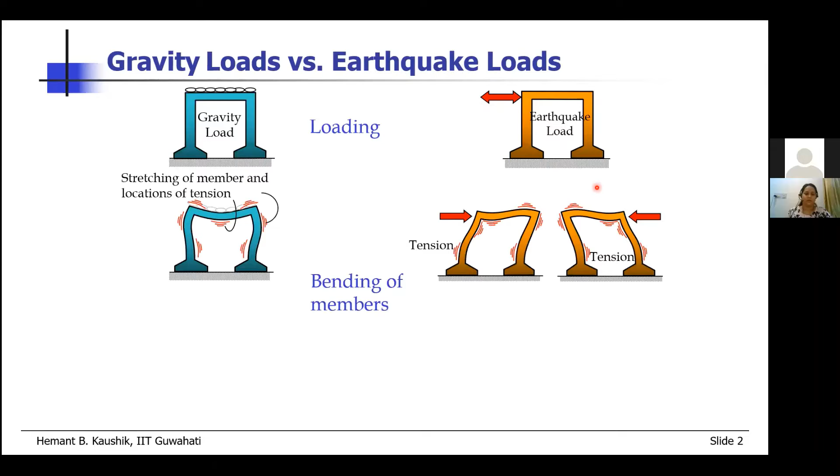In gravity loads, we understand very clearly that if there is a load acting on this beam, it will deform in a certain way, and because of this deformation, there will be corresponding deformation in the columns. We know in a very deterministic sense that there is stretching of members at the bottom of the beam at midspan, and at the top of the beam near the supports. These are the locations where we need reinforcement. Similarly, in columns, we know very well where will be the tension and where we need more steel.

In case of earthquake loading, the earthquake loads reverse—they change direction at every instant of time. So at one instant it acts from left to right for this frame, and at the other instance from right to left. Because of this change in direction, the bending of the members also changes.

So for one particular instance, the face of the member, or the location in the member that is under tension, may not remain under tension at the other instant. Some other locations in the member will undergo tension instead. That means we need to be careful about designing these members as far as the earthquake loads are concerned.

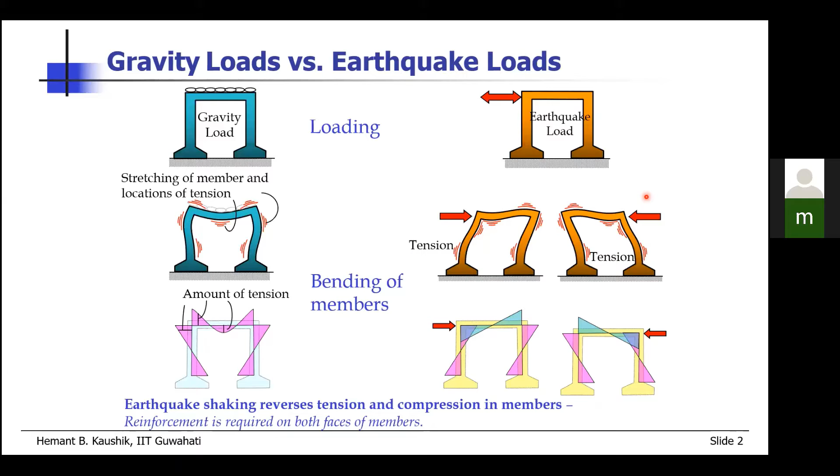There are many other uncertainties related to this type of loading. We will discuss all those uncertainties, and how to handle and take care of them in our analysis and design. And finally, how to estimate the vulnerability or the risk.

This vulnerability assessment cannot be done using hand calculations. You need to have some computer programs, some analysis tools. So what do we expect from a computer?

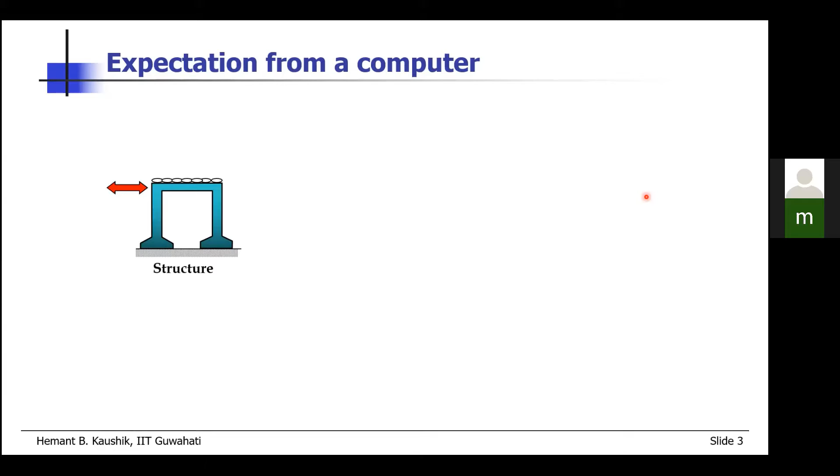So we have a structure and we have a computer. What we want is somehow to feed the structure into the computer, and then we expect the computer to do this analysis and give us the deflected shapes or the mode shapes, which we have just seen. Depending on that, it will tell us the force resultants, which we use along with the deflected shapes and mode shapes to design the structure.

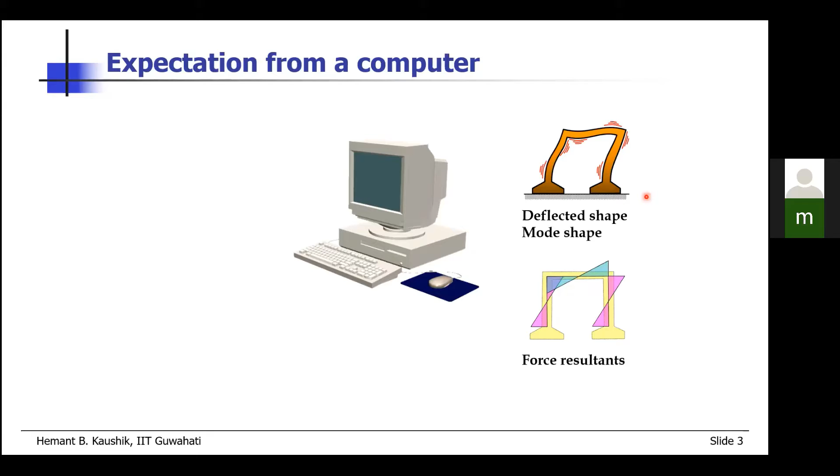Now this is very simple when I say it, but you also understand that the quality of these deflected shapes, mode shapes, and force resultants depends on the quality of the input. If you feed junk into the computer, you will of course get junk out. So the input parameters we give to the computer program are really important—most important—to provide realistic input and model the structure properly so that we get meaningful response quantities.

The question remains: how do we analyze? Historically, we have several methods of structural analysis, starting with the linear static analysis, which is the simplest method. One of the linear static analysis methods is the equivalent static analysis, which is also given in our Indian standards.

The next type of analysis, which is slightly more complicated and requires more input parameters, is the linear dynamic analysis. As the name suggests, this method includes time variation—it is a dynamic analysis. So loads here change with respect to time, but the previous one was the static analysis.

In case of linear dynamic analysis, we have quite a few methods. I'm just showing you two here: response spectrum analysis and time history analysis, where we apply real ground motions to the structure, but assume the structure behaves linearly—there is no non-linearity modeled here. So here the structure was linear and the loads were static and constant; now the structure remains linear, but we have changed the loads to dynamic.

The third type of analysis is where we consider the non-linearity in the structure—it may be material non-linearity or geometric non-linearity. Again, we do not consider the variation in loads with respect to time, so it becomes non-linear static analysis.

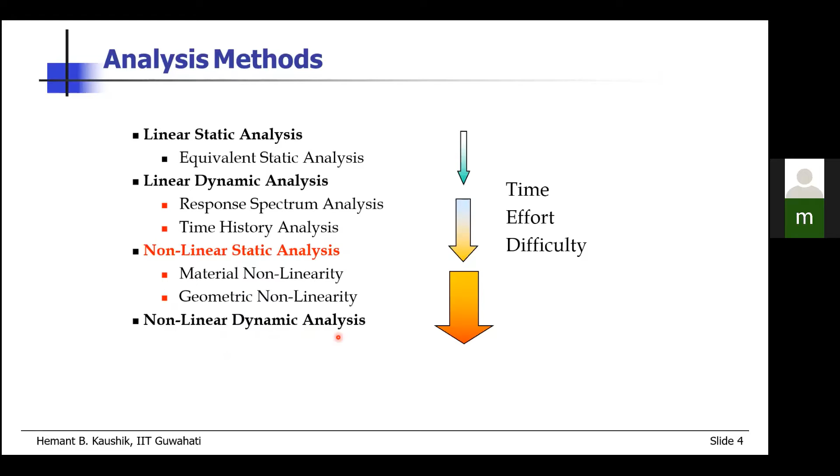Mode shapes of buildings are one of the important properties of the structure that depend on all these parameters. Whenever we carry out any dynamic analysis, we always first look at the mode shapes. That tells us if there is any problem with the model, how our structure behaves, what kind of natural frequency it has, and what kind of different mode shapes it has. So mode shapes are a really important property of the structure, and they depend on all the input parameters we just spoke about.

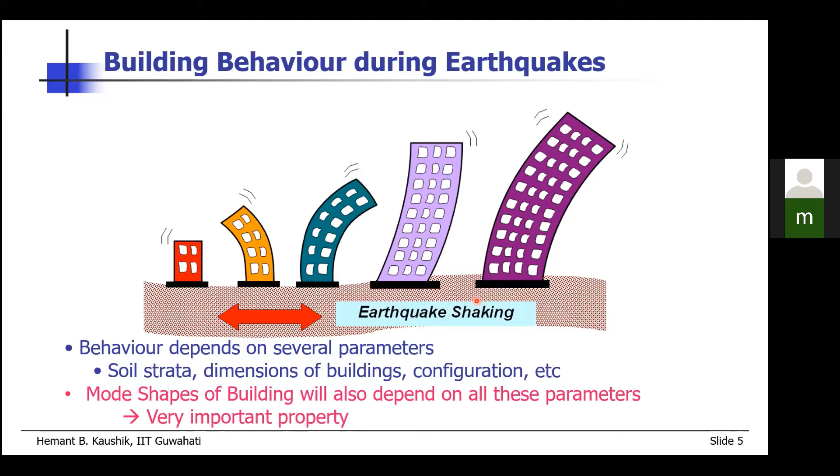Considering all these issues, when we want to estimate the risk, we need to know the hazard at a given site. What is hazard? We'll discuss in detail what hazard is and how we estimate it. We need to know the vulnerability of the construction - that is what today's lecture is all about. Why do we need seismic vulnerability? Because it is one of the input parameters required to estimate the seismic risk. That's the simple reason. Risk is also a function of the exposure of the elements.

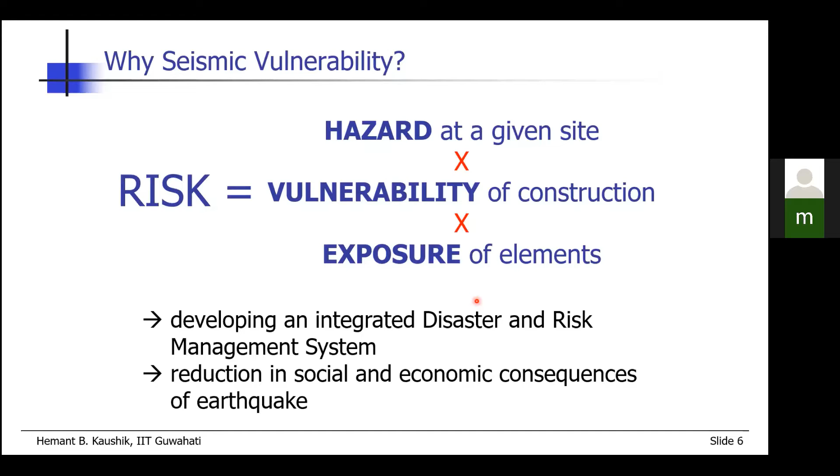These three quantities, which are themselves quite complex in nature, combine together to give the estimation of risk. Why do we need the risk? In order to develop an integrated disaster and risk management system for any city or town, we have to understand how much risk there is to different properties and things, in order to reduce the social and economic consequences of any hazard. Earthquake is just one hazard - if you live in a flood-prone area, you need to estimate flood risk; if you live in an area with cyclones, you have to estimate that risk. So risk is always a function of these three parameters: hazard changes from region to region, the vulnerability of construction changes, and the exposure of elements also changes. This is why we need the assessment of seismic vulnerability, primarily to estimate the risk involved.

Now, if I want to define the vulnerability properly, let's concentrate on how many things are required to define or estimate the vulnerability. The degree of loss or the probability of loss to a given element at risk resulting from a given hazard in a specified time - this is a proper definition of vulnerability.

So what we are talking about is the amount of loss, or the degree of loss, or the probability of loss to a given element at risk. That means maybe we are talking about some elements of a building, or the building itself, or a group of buildings, or a town itself. This is the degree of loss to the given element at risk resulting from a given hazard.

So maybe we are talking about earthquake hazard, or cyclone hazard, flood hazard, or any other hazard in a specified time. We have to define the time during which we are actually determining or estimating the seismic vulnerability. So we have to determine or estimate all these parameters in order to find the vulnerability.

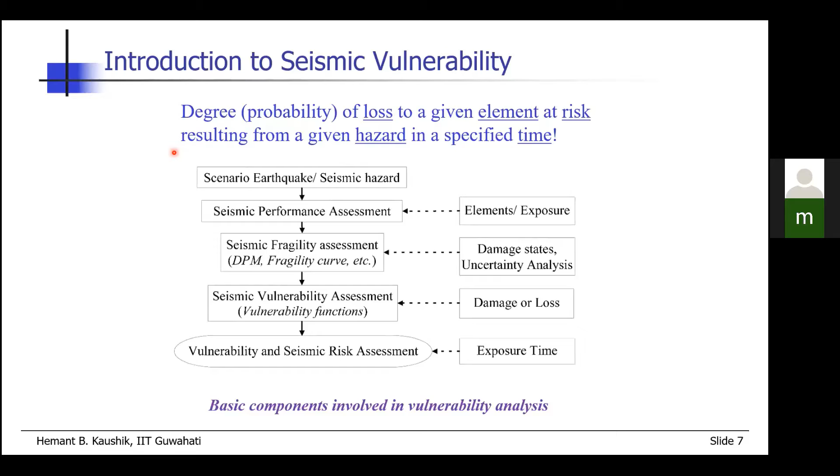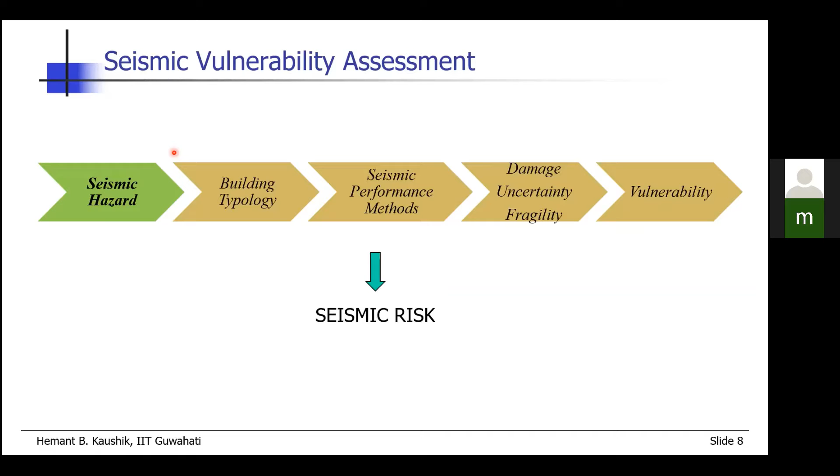So let us consider each of these, let us discuss each of these steps in more detail. These five steps will provide all the necessary tools to estimate the seismic vulnerability. I'll devote some time to each of these steps, which is finally required to find out the seismic risk. First is seismic hazard - so let us discuss how do we estimate seismic hazard and what is actually the seismic hazard.

If you want to define it, seismic hazard is any physical phenomena, maybe ground shaking or ground failure, associated with an earthquake that may adversely affect human activities. This was a definition provided by Shah in 1984. In simpler terms, any physical phenomenon associated with an earthquake that can damage structures or affect human lives—that is the seismic hazard, because it is related to earthquakes.

But remember, it may not be directly because of the earthquake shaking, but it may be the effects of that earthquake shaking, like ground failure or landslides.

There are two methods to estimate the seismic hazard: deterministic method or probabilistic method. Choice of method depends on the scope of work, the purpose of the work, and most importantly the availability of data. Any probabilistic method requires a huge amount of data, and even deterministic analysis improves with more data.

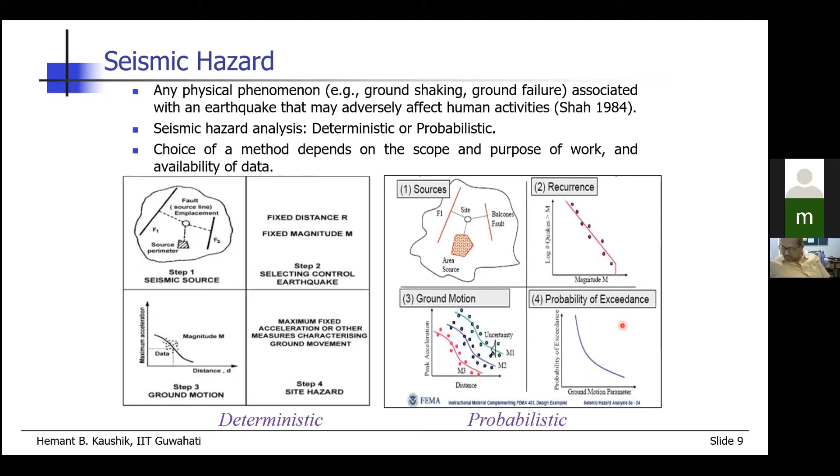This is basically the probabilistic hazard. For example, there's a 50% chance of exceedance of a magnitude 6 earthquake, or a 25% chance of exceedance of 0.3 g PGA. This is how we define the seismic hazard.

What is the output of this seismic hazard analysis? It is shown here. Before discussing this, let me first discuss this figure. This is the design response spectrum given in our IS code. Using this design response spectrum, we design our structures. So the deterministic response spectra is shown here.

So what it gives you is the period of the structure. Let us say it is 1 second. And for that structure, what will be the spectral acceleration, how much will be the design acceleration, considering 3 different types of soil? If the structure is located on rocky soil, it will be designed for lesser acceleration. If it is on soft soil, the same structure will be designed for higher acceleration.

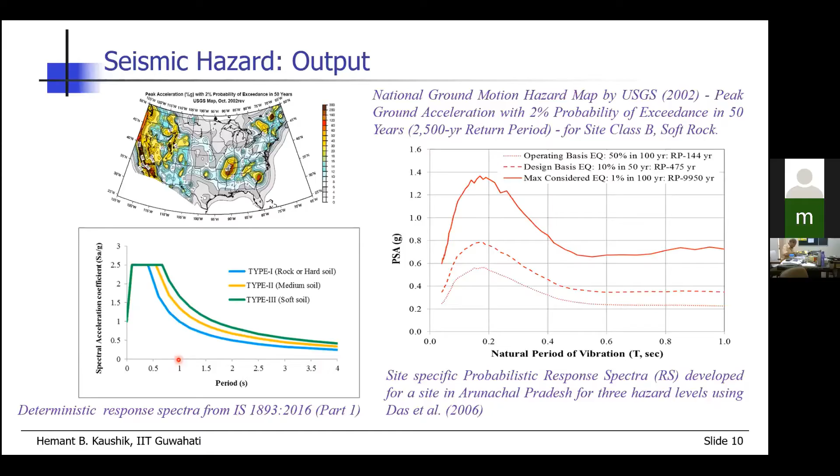Seismic hazard output is being prepared for India, and I think within a few months or a year we will also get such kind of maps in our IS 1893.

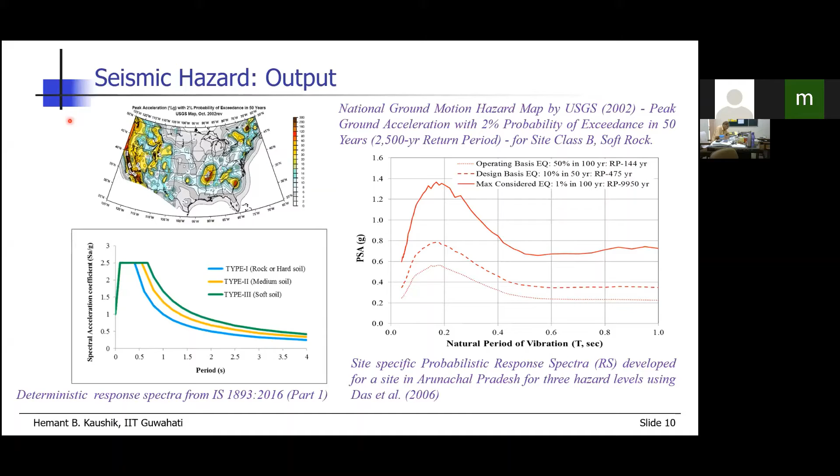Okay, so once we determine the seismic hazard, the next step is building typology, determining or identifying the building typology. But before I go to that slide...

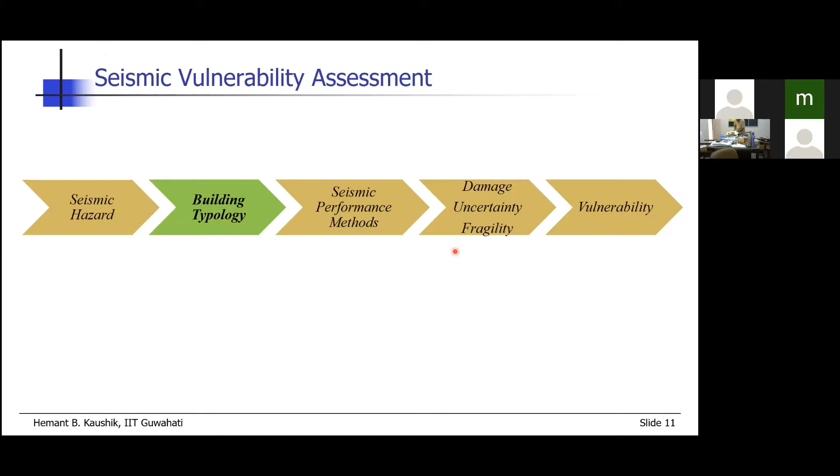This is a very important step because particularly in Indian conditions, you will appreciate that there are a large number of building typologies available. So unless we know what type of buildings are there, we will not be able to determine their performance or how they will damage under different seismic hazard conditions. So then it's impossible to assess the seismic vulnerability. Let us see how we identify these building typologies.

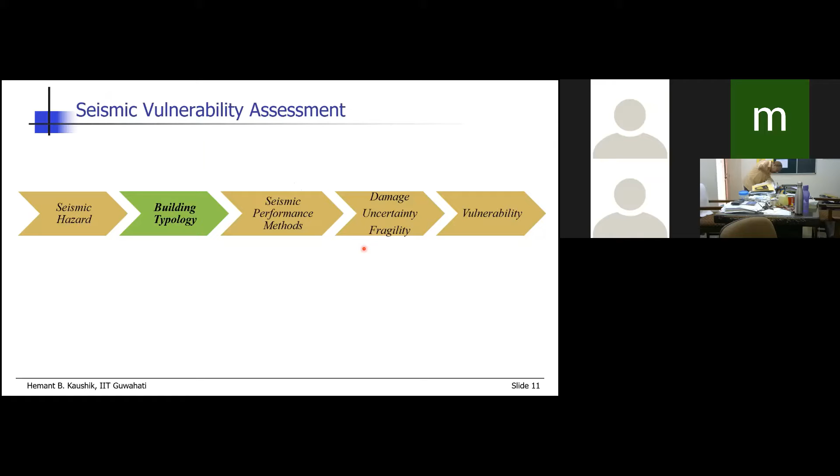Now the simple step here is identifying the building inventory - first to know what are the sample of buildings. We cannot visit every building in a city to do this, but we have to select samples which represent the prevalent building stock in an area.

Now there are a large number of parameters considered in classifying buildings. Some of these parameters are the structural material - reinforced concrete, steel, masonry, aluminium, whatever. Structural system and configuration - is it a frame system or simply an unreinforced masonry building? The configuration means whether it is an open ground story building, a braced building, a very tall building, or a short building. So that comes under configuration.

The number of stories or height - low rise, medium rise, high rise. The age of the building, how is the maintenance - because buildings maintained poorly will of course perform poorly during earthquakes.

And this is not an easy task to find out. What type of soil is there? What type of foundation is provided? Is there structural continuity or are there structural gaps between different modules of the structure? What type of design and detailing is there? What is the construction quality?

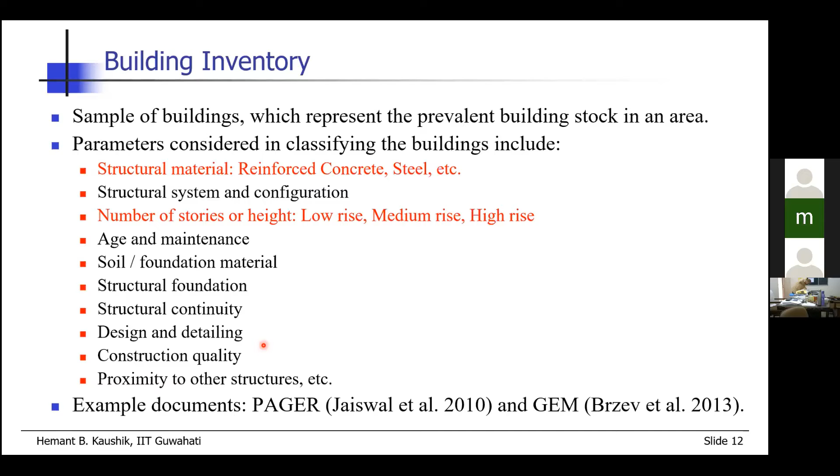So there are many documents available, actually a large number of documents. There are two very widely used documents. The first is PAGER, Prompt Assessment of Global Earthquake Response. And second is GEM, Global Earthquake Model. So these are widely used models to define the building inventory.

You may not appreciate now why we need to be so worried about this building inventory, but in 2-3 slides you will start appreciating it. Now there are many models available in the literature which define these building inventories. For example, Medvedev and Sponheuer define the MSK classification.

So they're more worried about the construction material. They don't bother about the building height or the load resisting system—only based on construction material, they define the building inventory. But then there are many others. For example, ATC 13 defines everything. It classifies the building based on load resisting system, building height, material, construction quality, soil foundation, age, and proximity. So it's a very detailed document. Similarly, there are many others.

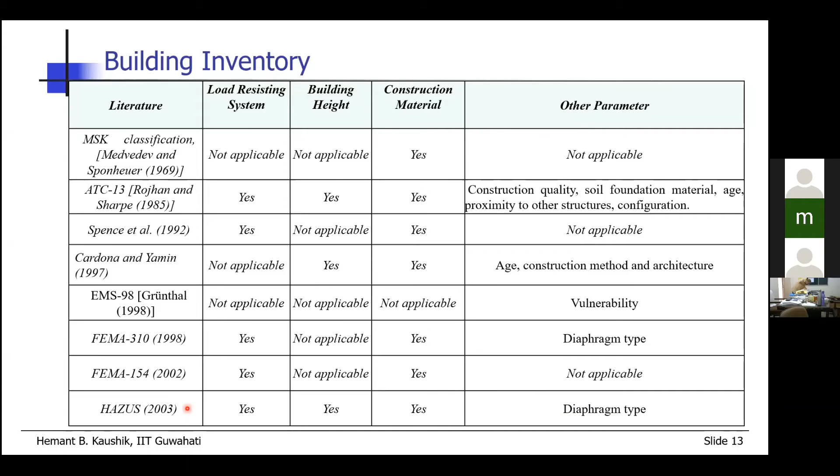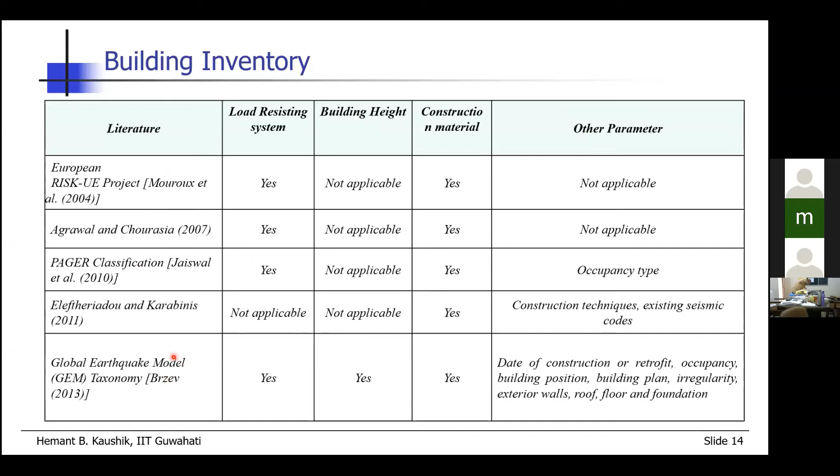And this MSK, you must be knowing, is an intensity scale. Another is EMS, that is also used. FEMA documents are there. Recently, this HAZUS—or people also call it HESUS—is one of the most recent and most detailed building inventory documents. You will find a large number of buildings in the whole world here. Then many others, like the European project, Mouroux classification comes here. This is the Global Earthquake Model, GEM taxonomy. It is also very detailed.

Once we understand what type of building typology is there, the next step is to determine its seismic performance—to model this building and find out how it will behave or perform during earthquakes of different intensities. Now, if we don't know the type of building, the material used, the framing system, the proper dimensions, or the lateral load resisting elements in the building, if we don't know these parameters, it is impossible to find out the seismic performance.

We cannot plot the bending moment diagrams. We cannot model the nonlinearity in the building. So that is why it is very important.

I was involved in one of these studies where we find out how many building typologies exist in the northeastern part of India, in all the states here. So we visited many places and found that in a single Arunachal Pradesh state, there are more than 500 building typologies. If you go to different villages, there are many building typologies which are not there in any other village. Similarly, if you cover the entire country, you will have thousands and thousands of building typologies.

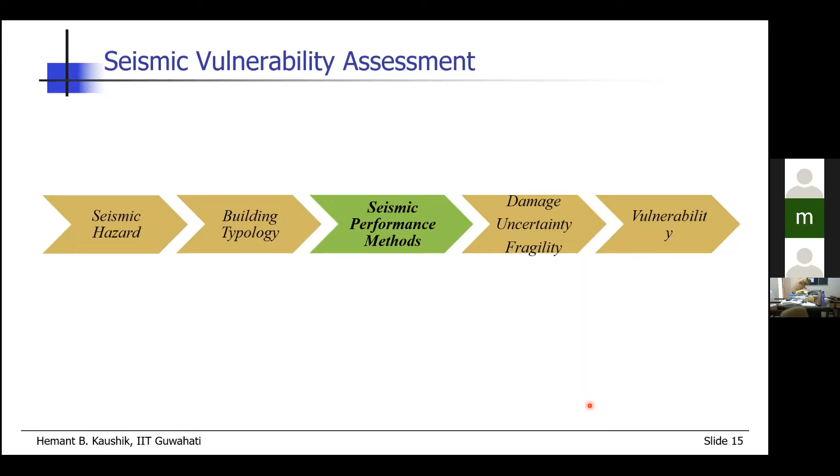So next is the seismic performance assessment methods. Once we define the hazard and the building typology, clubbing these, we have to find out how this building will behave during earthquake. Now, there are primarily two methods that people generally use in seismic performance assessment: the nonlinear static method and the nonlinear dynamic method. Both are good, both have their advantages, both have their disadvantages. So depending on the availability of data and the requirement, we use both of them.

Nonlinear static and nonlinear dynamic, as the name suggests, both cover the nonlinearity in the material or the nonlinearity related to the geometry. But in the first case, the loads are static in nature, so we don't use ground motions here. In the second case, the loads are dynamic in nature, so we use real ground motions for structural analysis.

And that is the whole reason nonlinear static analysis methods are computationally less expensive—they require less computational time and effort. But nonlinear dynamic methods, because they need real ground motions, require comparatively higher computational time and effort. We cannot include the higher mode effects or the dynamic and inertial effects here in static methods—we include them, but only within approximation. The real inertial effects cannot be included like we do in the dynamic method.

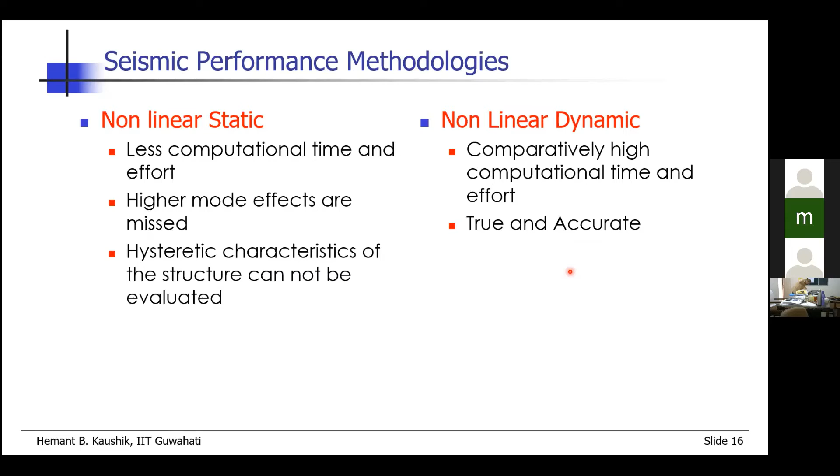The hysteretic characteristics—basically the cyclic nature of loading with high frequency—are not determined in case of nonlinear static analysis. But in nonlinear dynamic, we can capture all these things, though we require a lot more input data. So we will first start with a very simple method, which is the capacity spectrum method of analysis.

So what we do here—first, why do we need this capacity spectrum method?

This is to basically determine what will be the performance of the structure because of a particular earthquake. So there are two different modules here. First is the construction of demand spectrum—how much is the demand on the structure? And the second is construction of the capacity spectrum—how much is the capacity of the structure? So we need to combine these two.

We need to superimpose the demand and the capacity of the structure to get how much will be the requirement from the structure from that particular hazard. So how do we calculate the demand? We have already covered the seismic hazard assessment. We consider the earthquake, and from that earthquake record, we develop the demand spectrum, the spectral acceleration versus the spectral displacement—this is the ADRS spectrum.

And we convert this elastic design spectrum, elastic demand spectrum, to the reduced demand spectrum, considering the various uncertainties and a variety of parameters. We'll discuss this later.

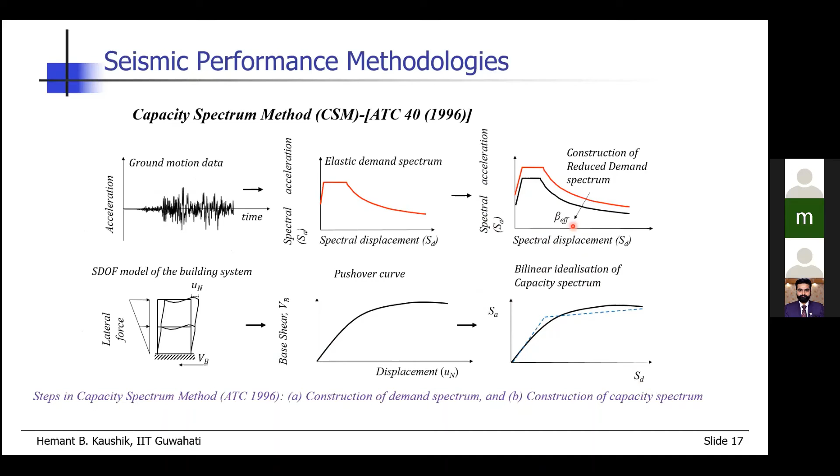Another method is the displacement coefficient method. Here we don't require the conversion of the capacity curve into a capacity spectrum. If you remember, we converted this capacity curve into the capacity spectrum, which is the SA versus SD curve, similar to the demand spectrum. Only then can you superimpose these two. So that takes time to do.

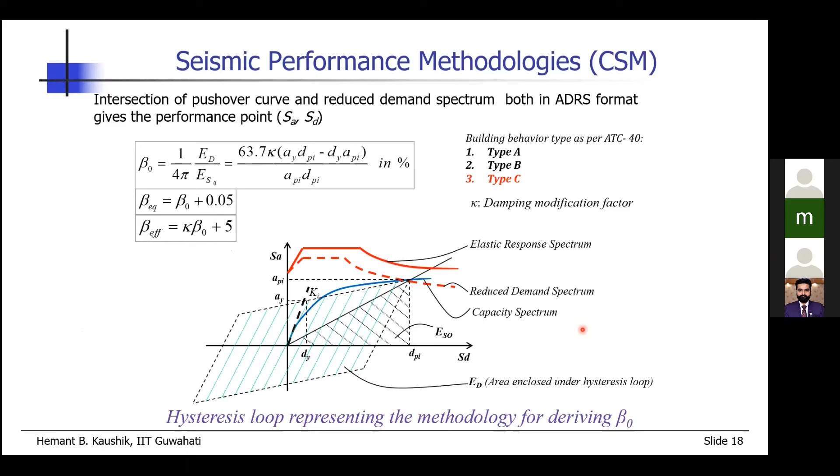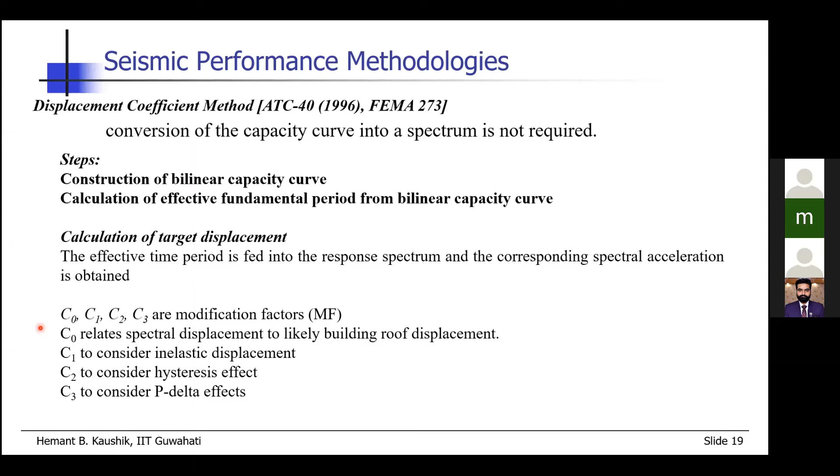Therefore, the capacity spectrum method shown here was modified, and people have proposed another method, the displacement coefficient method. The steps are similar. We first construct the bilinear capacity curve, and we calculate the effective fundamental period from it. Then we calculate the target displacement—there is a detailed methodology given where, without converting the capacity curve into a capacity spectrum, we can determine the target displacement using this method. So what we need is the target displacement so that we can move to the next step.

Then there are other methods also available. For example, the N2 method is there for seismic performance assessment. It is based on the ductility dependent inelastic response spectrum. If you remember, previously we used the elastic response spectrum or equivalent nonlinear response spectra. So here is the inelastic response spectrum.

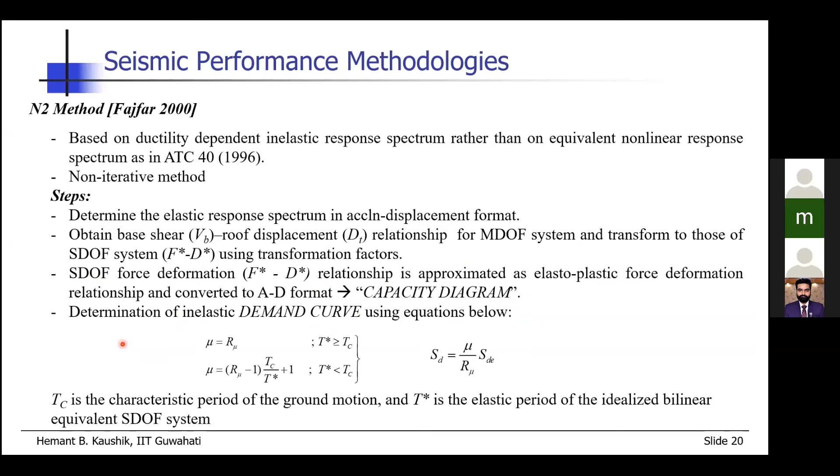Now determination of this inelastic demand curve, basically the response spectrum, is done using these methods, which are standard methods available in any book. So once you do this, we are ready to determine this. It gives us directly, without iteration, the target output. So this is as far as the nonlinear static analysis methods were concerned.

Now there are nonlinear time history analysis. So these are the dynamic analysis where we consider the nonlinearity of the structure, as well as we consider the real ground motions, which are random in nature, so the loading here is a function of time. So what we do here is we apply the acceleration record data to the structure and we obtain step-by-step response of the structure. So you will realize that here the output that we get is very large. Huge amount of output is generated here.

So let us say you have an earthquake which is of 30 seconds duration. Now you have to define these earthquakes using a large number of points and you give it to the software. So for each of these points, for each of these accelerations in the ground motion record, the structure will respond. And for every instant, you get a response of the structure as an output. So overall the size of the output is tremendous here. So you have to read it. It's very complex, and how to interpret the output.

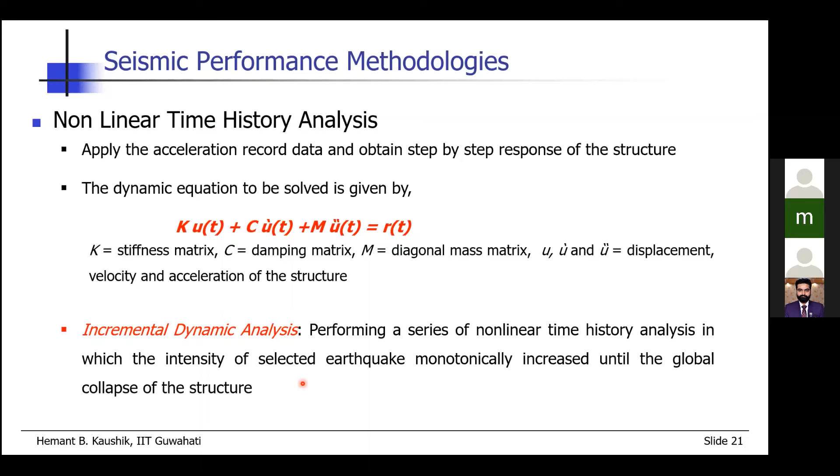Now, again, it is not easy to find out when the structure is collapsing, because it is not something which is similar to the nonlinear pushover analysis. Here you have to actually plot the IDA curve, and depending on the slope of that IDA curve, IDA means incremental dynamic analysis, you have to judge, like, this is where the structure has yielded, this is where the structure has collapsed. But it gives you a lot of additional data.

Fine, so once we know somehow how is the seismic performance of the structure, the next step is integrating the damage, integrating the uncertainty, and integrating the fragility to these seismic performances.

The first step is the damage states. We have to define these damage states for a particular structure. These damage states are a function of building typology, so they will be different for different types of buildings. For reinforced concrete buildings, the damage states will be different. For unreinforced masonry buildings, the damage states will be different. So you have to define them for different types of buildings.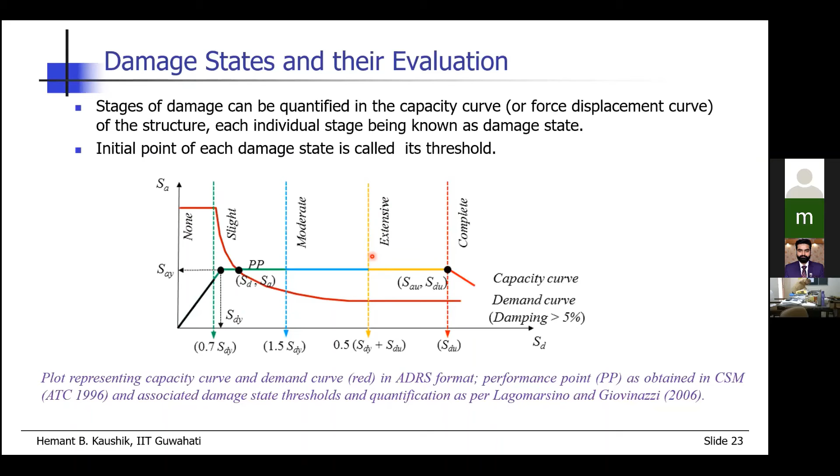There is a large number of literature defining damage states for different types of structures. Starting from 1989, based on experience and judgment, damage states were defined using colors - green, yellow, and red, with red indicating unsafe. You might have noticed these kinds of stickers pasted on buildings after earthquakes. They come from ATC guidelines.

There are many other damage state definitions. Hazus US defines 5 damage states based on structural and non-structural damage for different model building types: none, slight, moderate, severe, and collapse. EMS also defines 5 damage states, in terms of negligible to slight damage, slight to moderate damage, and slight structural to moderate non-structural damage. People have devised several methods and definitions for these damage states, all related to different buildings.

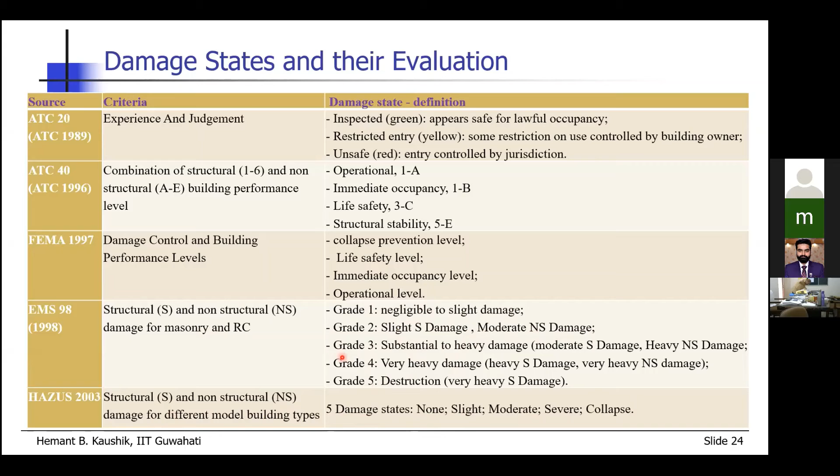There are many studies. This is the damage scale we discussed - Lagomarsino and Giovinazzi - which depends on the yield displacement and ultimate displacement of unreinforced masonry or reinforced concrete structures, giving 4 damage states. Rossetto defines 7 damage states, and similarly Barbat has different damage states. People have defined a large number of methods, and you can use any of them, or define your own damage states.

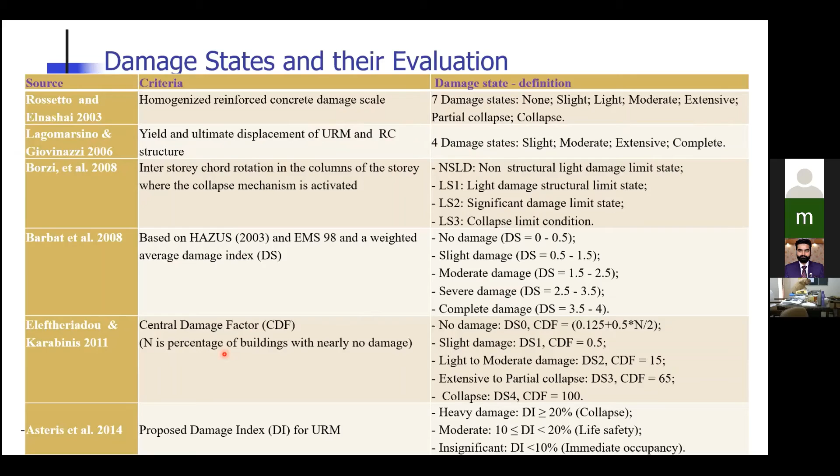Once we define these damage states, we can say how this building performs at a given damage state. But then we have to consider the uncertainty also. Let us discuss the different types of uncertainties, because it is very important to know how approximate our assessment is.

The classification of different sources of uncertainties for fragility curve derivation are shown here. Generally we consider the total uncertainty as the SRSS of all possible uncertainties - square root of sum of squares. For a particular damage state, this beta can be a combination of uncertainty in capacity and uncertainty in demand. There are other classifications, but we'll concentrate on these two because they are major. There can be some others also.

Uncertainty in capacity means the structural capacity, so all structural properties come into picture here. First is the dispersion in mechanical properties. Simplest example: if I specify the grade of concrete is M25, you already know this is a very approximate quantity. You test 6, 7, or 10 concrete cubes in the laboratory and get different results. You plot it and get the characteristic strength - not the mean strength - defined such that not more than 5% of specimens fall below that. M25 means this 25 is the FCK, characteristic strength of concrete.

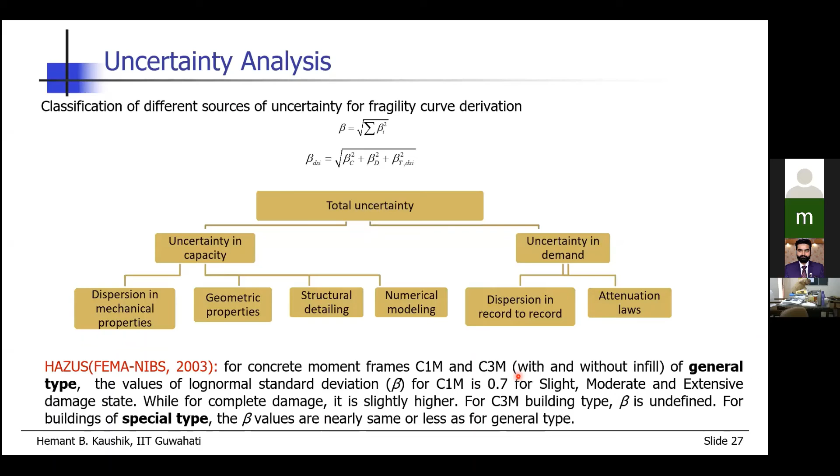So we combine the damage states with the associated uncertainties, and we finally get the fragility, defined mathematically as the probability of exceedance of a particular damage state, which is a function of the spectral displacement and the median value of the spectral displacement at which the building reaches a certain threshold of the damage state, DSi. So this median value of spectral displacement reaches the threshold of the damage state, and beta DSi is the standard deviation of the natural logarithm of spectral displacement. Phi is the standard normal cumulative distribution function.

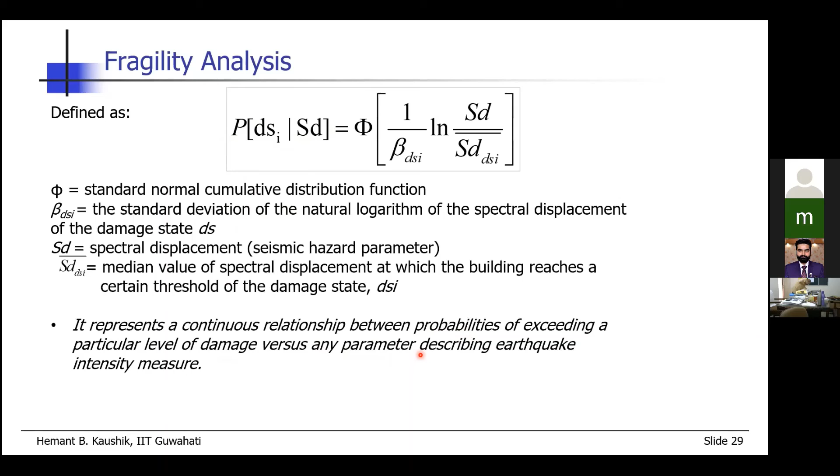These values are standard values found in any standard book. So what we finally want to know is the probability of exceedance of a particular damage state for that structure, which we define in terms of spectral displacement. It represents a continuous relationship between the probability of exceeding a particular damage state versus any parameter describing the earthquake intensity measure, such as pseudo-spectral acceleration, PGA, or spectral acceleration. Let us see how we plot it.

This is the seismic fragility in a continuous probabilistic sense. Here we are plotting the probability of exceedance of a particular damage state in terms of spectral displacement, and on the x-axis we have the spectral displacement.

This green curve represents the slight damage state, blue is the moderate damage state, this is the extensive damage state, and this is the collapse damage state. You will find that the probability of exceeding the slight damage state, even at less displacement, is higher, since slight damage may occur at a lesser displacement. The probability of occurring collapse at a smaller displacement is very low, as shown here, and that is how we interpret these curves.

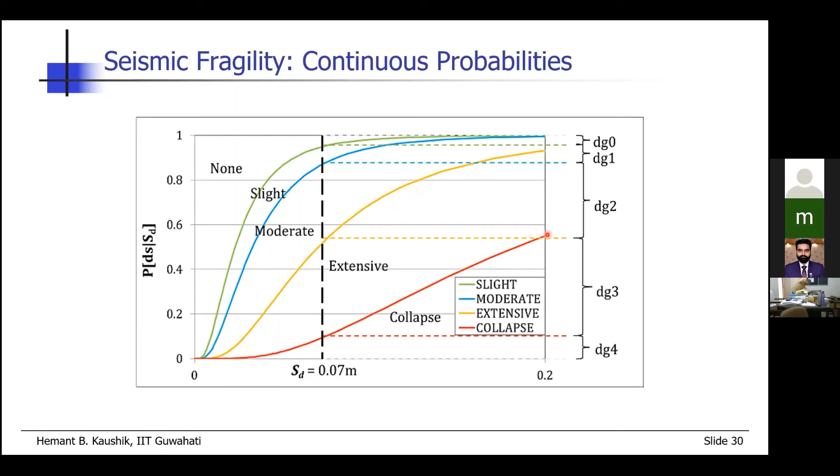Now we can use these curves to determine discrete probabilities as well. Finding the relative values DG0, DG1, DG2, DG3, and DG4, we can plot them and get discrete probabilities for individual damage states—the difference between two damage states at a particular spectral displacement. For example, at 0.07 spectral displacement, you get DG0 as around 0.05 to 0.04. So this is a discrete probability.

There are different methods and ways to interpret these results. This damage probability matrix, DPM, specifies the discrete conditional probability of reaching or exceeding a damage state for a given earthquake intensity, for a particular value of spectral displacement. So for each different value of spectral displacement, we can define this probability.

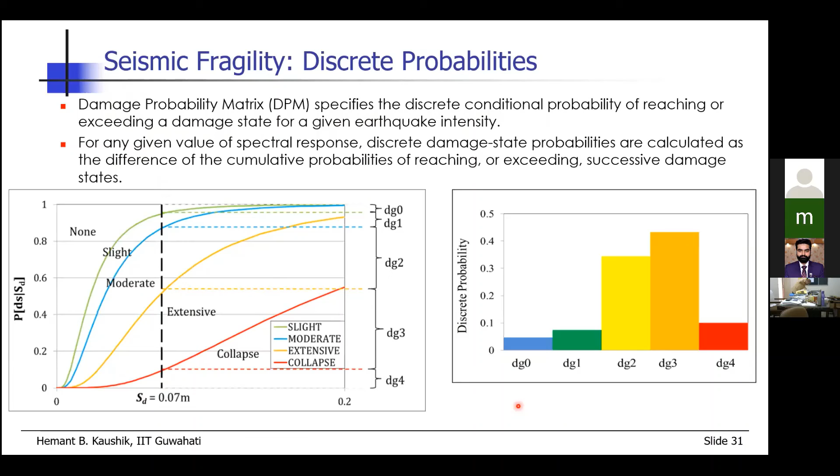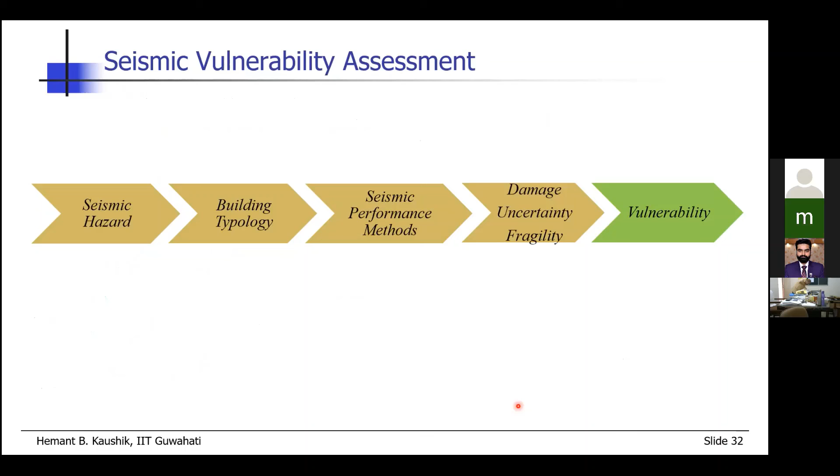Then last is the assessment of vulnerability. Once we have all these, the vulnerability is of course different from fragility because we have to include the loss estimation also. It may be structural loss, monetary loss, or loss to life, etc. So including the loss to the seismic fragility, we get the vulnerability estimation.

Now there are many methods of estimating the seismic vulnerability, broadly categorized into empirical methods, analytical methods, judgmental methods, and hybrid methods.

We often use the rapid visual screening, RVS, of the buildings. So if you don't have any of these data available, no hazard, no structural types, no structural capacity, we don't have any idea on all these. So the simplest, very preliminary method that people use to assess the seismic vulnerability is RVS. We can say that this building is safe or unsafe in a very simple sense. But most of the times, just by looking at the building, it is impossible to check the condition of the building. So we have to do detailed analysis for some buildings.

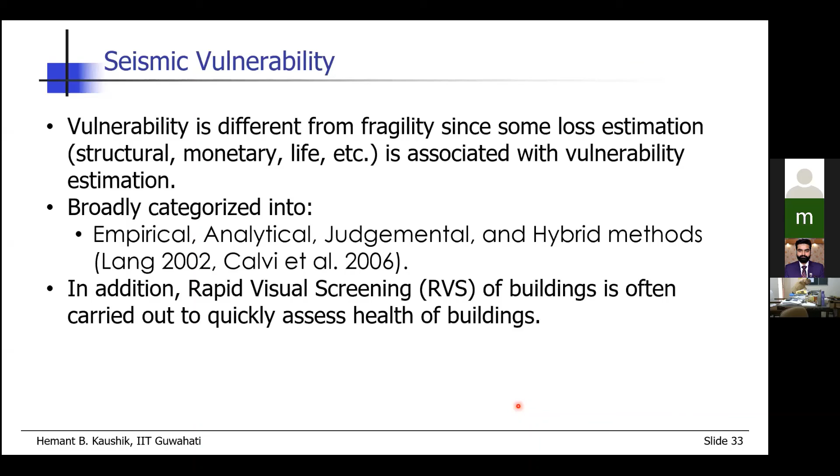This is how we carry out the rapid visual screening. We develop the budget, identify the area to be screened, review the forms required to be filled, and train the screeners if it's a large area to be covered, involving a lot of people. Then we review the data, the building database files and soil types, and construction drawings. Then we screen the building, sketch the plans and elevation. While visiting, we verify the construction type and plan irregularities. If access to interior is possible, we take photographs and enter the records.

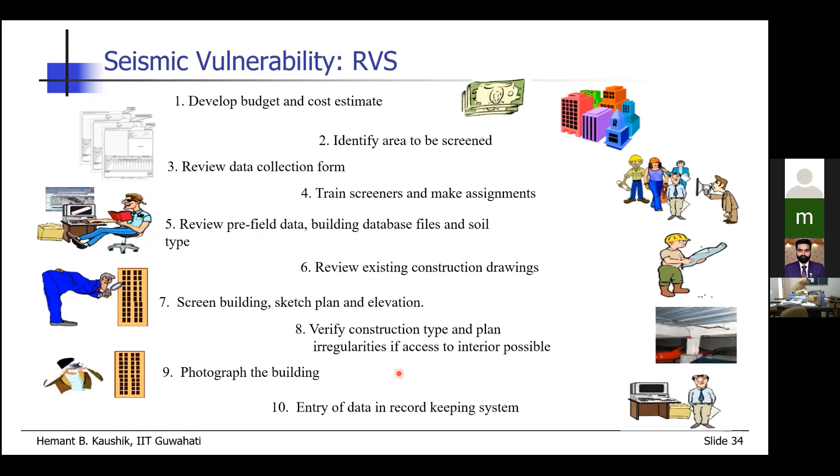So this is a simple RVS which many people carry out. But like I said, it only gives you a very preliminary idea. It can tell you only about very good buildings or very bad buildings. So what to do with the intermediate buildings, it cannot tell.

Now, next method is the empirical vulnerability assessment, which is based on quantitative or qualitative analysis of post-earthquake damage data. So there are many earthquakes occurring, and people study those earthquake damage data and the distribution of damage. Then they define empirical vulnerability functions directly from these damage observations from past earthquakes, and relate these with the area under consideration. So they can say that if similar earthquakes occur in this area, which is also similar to that area where this earthquake has occurred, similar types of damage are possible. So it's based on limited damage data observed in the field, covering only a limited range of earthquake magnitudes, and it's limited to the locality for which the damage data is extracted - a region where previously some earthquake has occurred.

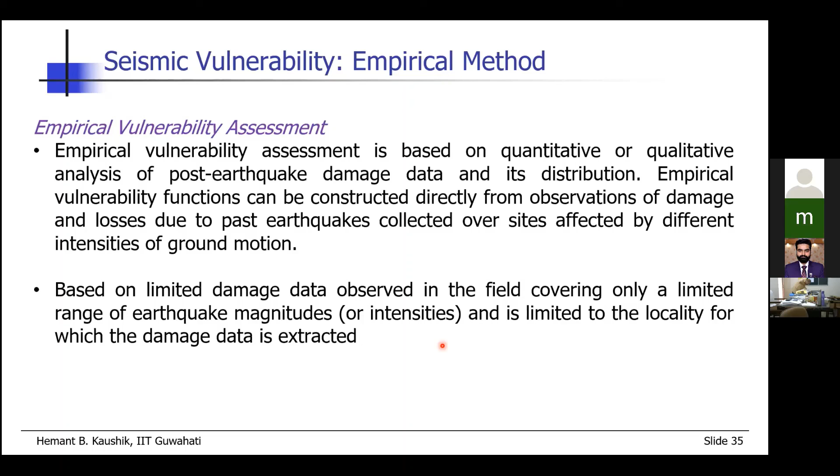For example, there are people who have actually done research and given some method of assessment of the seismic vulnerability, as the conversion of physical damage into monetary loss given a measure of the ground motion. So it combines the damage, the loss, and the ground motion intensity to give some assessment of the seismic vulnerability. I'll not go into too much detail here, but it depends on the cost, material cost, labor cost, and the damage states. So it includes everything, then gives you the assessment. The advantage of this analytical vulnerability assessment is that it gives an opportunity to consider multivariate modeling of behavior for real conditions based on detailed numerical analysis. So it combines many things actually.

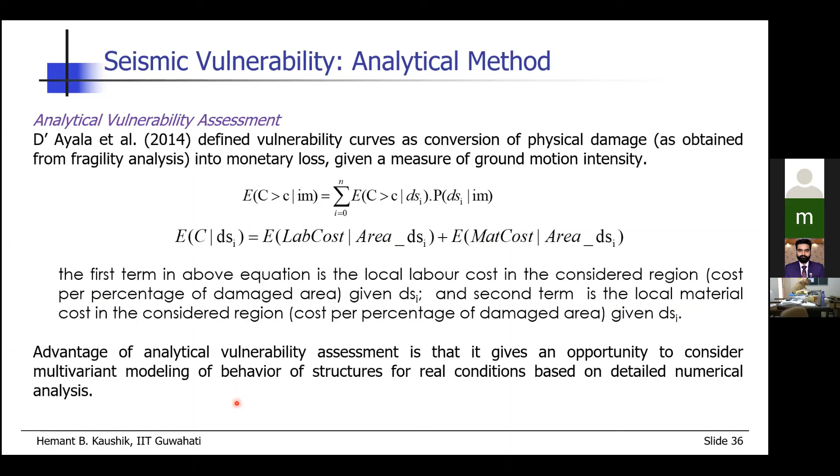But there are other methods, for example, the judgmental vulnerability assessment. Here a group of expert people are provided with some forms, and they fill those forms to give us some guidelines on how to estimate the building damage distribution, based on their own experiences in that region. This ATC 13 is where some of these forms are available. But you see, it is all subjective - it all depends on the person doing this assessment.

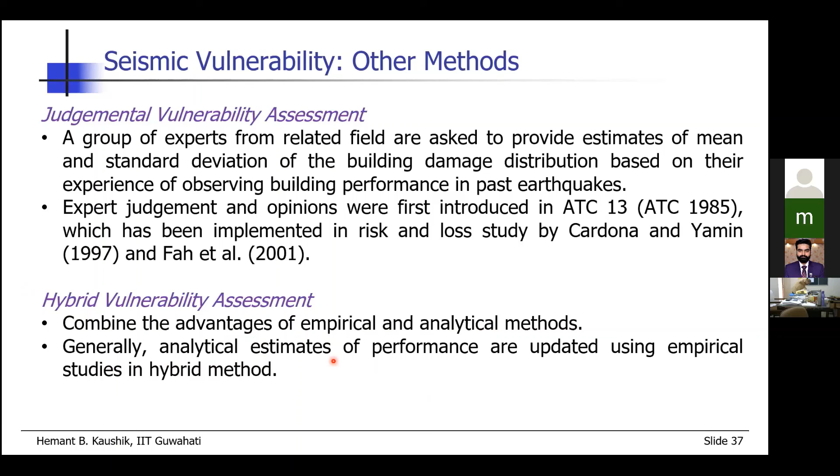Then the most widely used vulnerability assessment methods are the hybrid vulnerability assessment, which combine the advantages of empirical and analytical methods. So the analytical estimates are updated using the empirical studies. They combine all these - they take the judgment of experts, and also use the methodologies adopted in the past available in the literature, and it becomes hybrid in nature.

Finally, we try to get the risk, which is the natural output of the seismic vulnerability, because that is the whole goal of assessing the vulnerability. You can define the risk mathematically, as we have already defined, as a combination of hazard, vulnerability, and exposure.

If you want to define it in a sentence, it is the probability that social or economic consequences of earthquake, losses of lives, injury to persons, damage to property, economic activity disruption will equal or exceed specified values at a site. So again, the probability of such effects at a site or in an area during a specified exposure time.

Similar definitions apply, only the time is additionally provided here. So the losses per scenario as a function of annual probability will give the risk curve.

So this equation, for example, if you club all these: gamma of a star is the annual frequency of exceedance of design amplitude A, Fs is a factor of safety, C is the median structural capacity, and KH is the slope of the hazard curve in log-log space. So there are many variables associated with it.

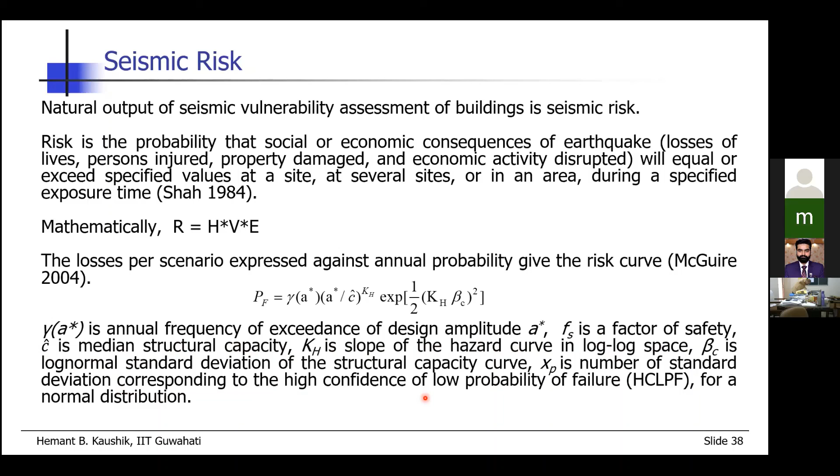Okay, so combining everything, we have defined the hazard, we have defined the building typology, we obtained the seismic performance, and we club this with the damage, uncertainty, and fragility finally to get the vulnerability and the risk.